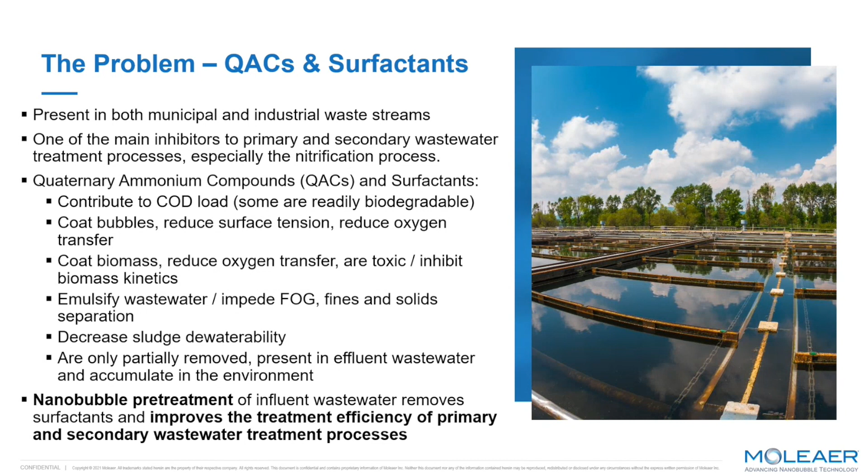They reduce oxygen transfer, which is our primary treatment method in wastewater treatment plants. They emulsify contaminants in water. They decrease the ability to remove water from our sludge at the end of the process. Overall, QACs and surfactants are working against the natural processes we use in wastewater treatment.

The source of surfactants is primarily from consumer products. They can be industrial in nature too, but when you think about your daily life, you have hand soap, laundry detergent, dishwasher detergents, degreasers in the kitchen or automotive parts, personal care products, shampoos, body wash, and cleaning and disinfecting products.

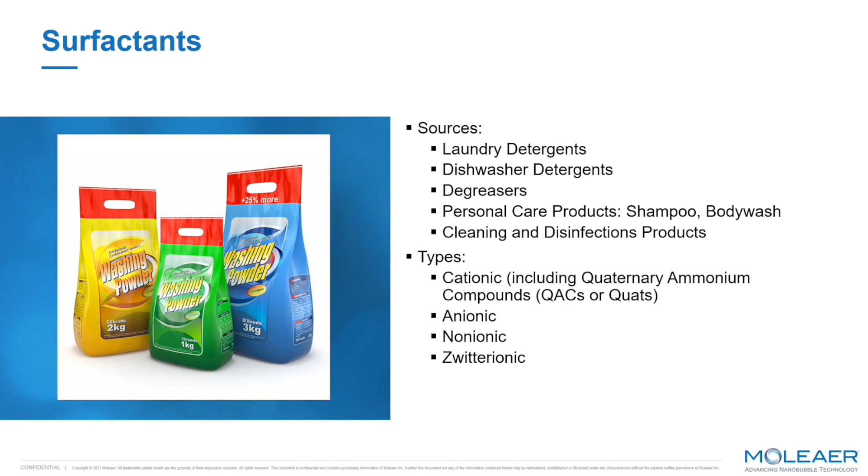Pretty much all of these products are common in that they are all different types of surfactants. They have different charges - some are positive, some are negative, some have both charges. But either way, these products all have a purpose, and that is to use water as a solvent to remove some other type of contaminant. So they're always trying to keep our contaminants within water.

So all of those chemicals have been around for quite a while, and the question always is, well, what's changed? Across California and most of the Southwest, the major change has been the amount of water we're using every single day. This has been really exacerbated by drought. We've always wanted to be more efficient with how we use water resources - it's one of the largest uses of energy in California.

But the droughts we've had over the years have made things much worse. Every single time we have a drought, there are new conservation measures. Back in the 90s, it was low flow toilets, low flow sinks, and so there was one level of conservation that occurred. Some of those things people fell back on when water resources were available - most people probably switched their shower heads back to a normal one because low flow ones aren't that great.

But after multiple years and multiple droughts, other major appliances have been changed out - washing machines, dishwashers. We're going from hundreds of gallons down to 20 gallons per load of laundry and even less on dishwashers. In a lot of these changes, when you spend that much money on an appliance, people aren't going back after the drought's over.

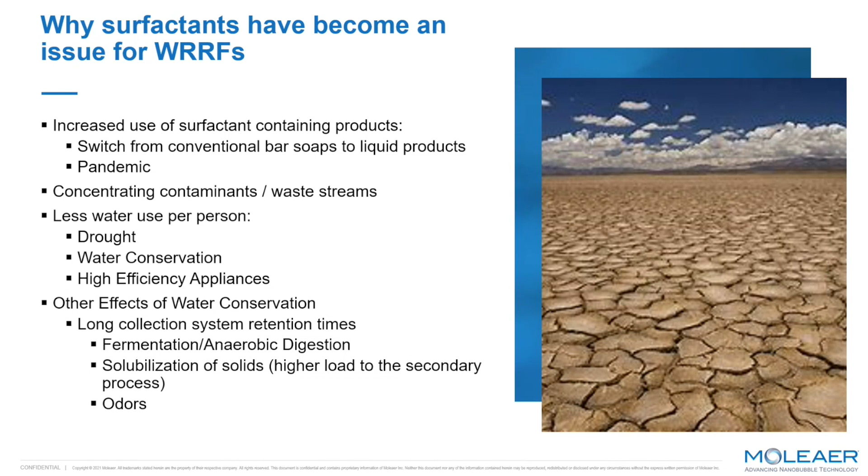So a couple of the effects that happen for wastewater treatment plants due to these lower flows and higher concentration of waste is that we have a lot more time - it takes a lot more time for waste to get from people's households to the wastewater treatment plant. This causes fermentation, anaerobic digestion of the waste. Ultimately, that means the waste is becoming more difficult to treat. Fresh waste is always easier.

So what are nanobubbles? They're extremely small - 2,500 times smaller than a grain of salt. Because of their size, they have some very unique properties that are different than any other bubbles. Some of these are that they lack buoyancy, they have random motion, and they have different charges.

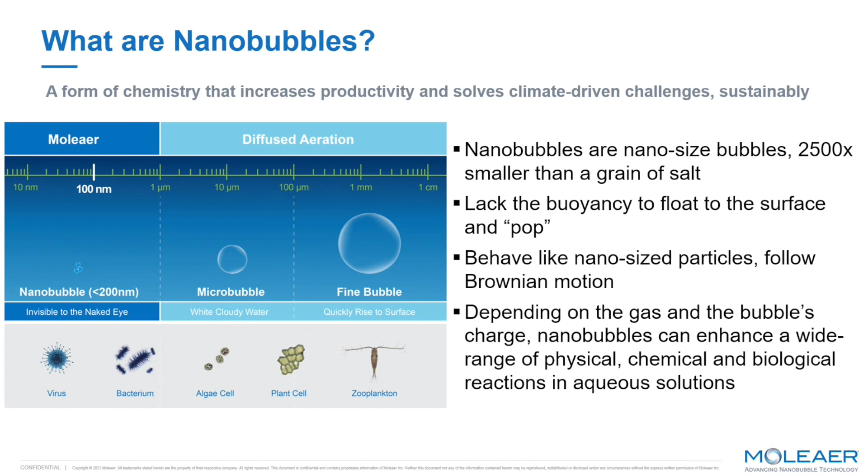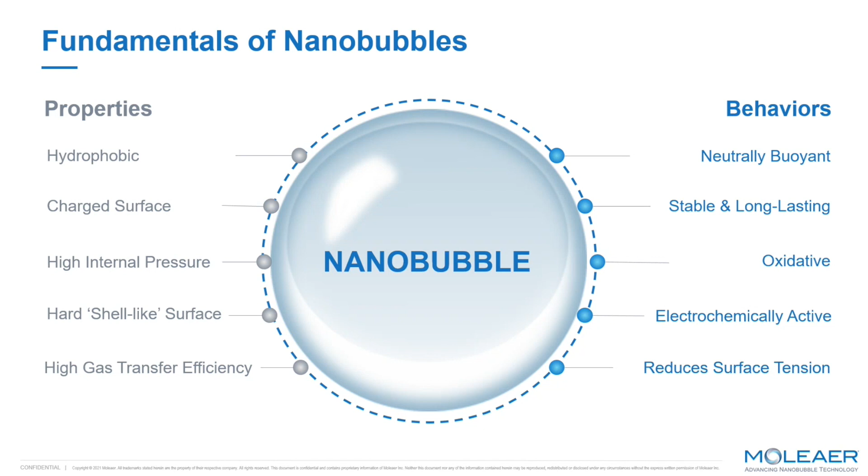The fundamentals of nanobubbles: they're hydrophobic, they have a charged surface, extremely high internal pressure, hard shell-like surface, high gas transfer efficiency. The behaviors are new, and these are what's very important to wastewater treatment - that they're neutrally buoyant, stable and long-lasting, oxidative, electrochemically active, and they reduce surface tension.

Surfactants interact with nanobubbles because of those properties and their size. Nanobubbles' hydrophobic properties are actually competing with the hydrophobic space that surfactants want to occupy. So the selection we see in wastewater treatment is that our nanobubbles and the surfactants want to occupy the same space. And because of their charges, they're attracted to each other.

So the theory is that when nanobubbles and surfactants come together, the nanobubble becomes destabilized and collapses. The collapse of the nanobubble produces a reactive oxygen species that we call the hydroxyl radical. When this happens, long chains - usually what we'd call the tail of the surfactant - are going to be broken down into something shorter and more readily removed from the wastewater stream.

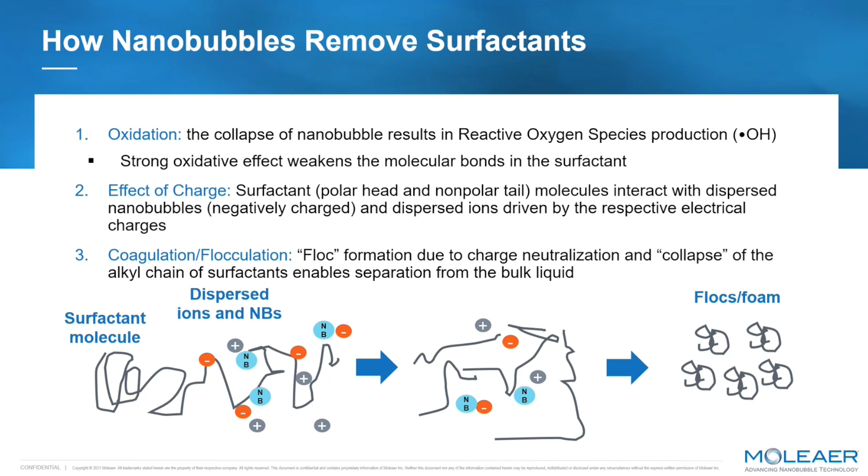Surfactants themselves are part of a measure in the wastewater that we call COD, or chemical oxygen demand. There are different types of COD, and this basically is how we measure the loading to a wastewater treatment plant. Some of the COD is particulate and can be removed in separation processes, either by filtration, sedimentation, or flotation. Other types of COD are soluble, like surfactants. One of the benefits to nanobubbles is that by breaking down these otherwise long chains of a surfactant, we're converting them from a slowly biodegradable form to something that's readily degradable and can be removed in the wastewater treatment process.

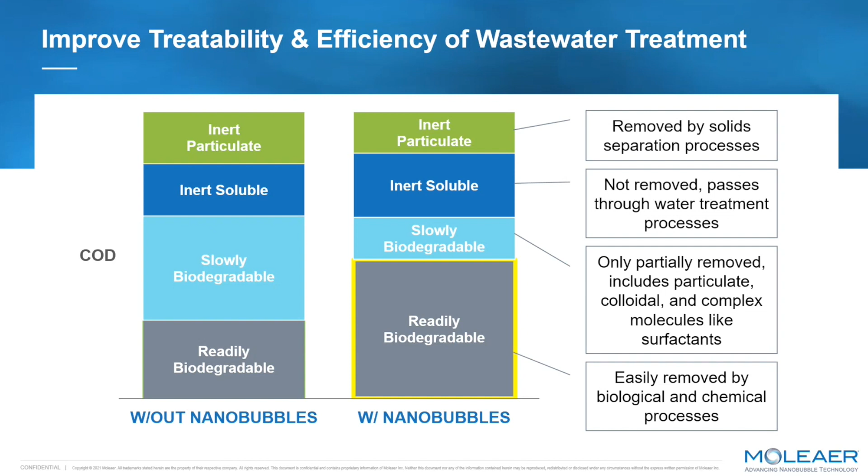So after a little overview on how nanobubbles are working as pretreatment in wastewater treatment plants, I'll go on to the full-scale demonstration at Goleta.

Goleta Sanitary has a design flow of 9.5 MGD. Their current average dry weather flow is 4.2 MGD, less than half of design, and yet they are fully loaded. Populations have increased, but the amount of water coming into the treatment plant has continued to either hold the same or decrease. So this plant is actually at its design capacity when it comes to contaminant loading.

Goleta's been aware of the impacts of surfactants since 2016, when they were having periodic upsets that were determined to be from periodic discharge from the airport across the street.

When you're on an airplane, the toilets that you're using don't flush with water. Instead, they use chemicals to stabilize the waste and reduce odors. Those chemicals are in that class of surfactant that I talked about earlier.

So a point source was really easy to identify and eliminate from the wastewater treatment plant, and we found a few others, got rid of those, and the plant was healthy again. The periodic upsets went away.

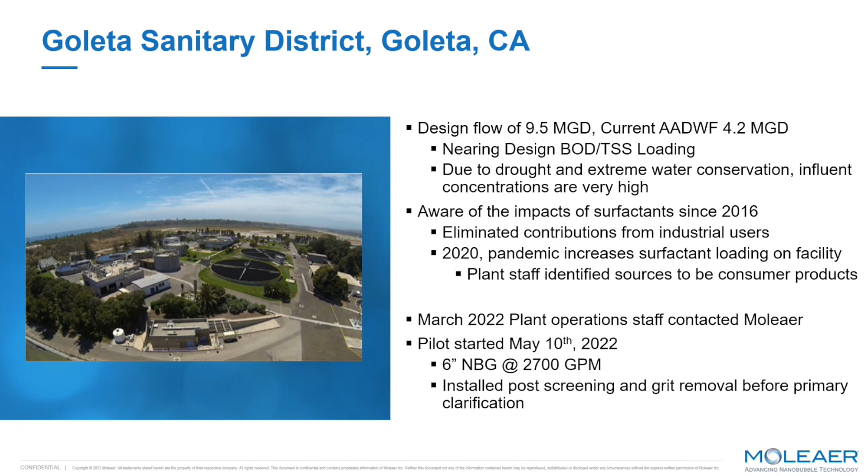For those of you that are not familiar with wastewater treatment, there are a few major steps that are consistent amongst most municipal wastewater treatment plants. First, we have preliminary treatment. This is where we want to remove things that really shouldn't belong in the sewer anyways. So we use physical screening to remove plastics and large objects, things that will plug or damage our pumps downstream. Next, we remove grit. This is fine grit and sand that would be abrasive and do damage, once again, to the pumps downstream.

The first process in most conventional wastewater treatment plants is primary sedimentation. This is where we use the relative specific gravities of the contaminants to either have them float to the surface or sink to the bottom, and we remove those contaminants.

After that, we have to go to a biological treatment process, and we use bacteria that consumes soluble contaminants within the water, and they use those contaminants as the building blocks to their own growth. So we're taking things that are soluble and putting them into biomass.

At Goleta, they have two different types of biological treatment process. The first one uses a media for the biofilm to grow on. So basically a lot of surface area, and they're spreading water over that surface area. The biology can attach to it. In between the water being spread, there's a lot of time for oxygen to come into the biomass. Once again, that oxygen transfer component is really important to wastewater treatment.

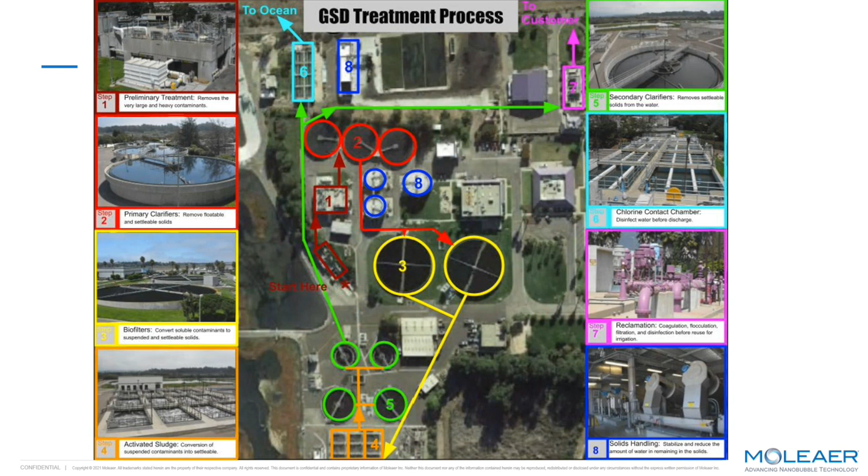Quick overview: the pilot installation at Goleta happened very quickly. We were able to get Moleaer to arrange delivery of a self-priming pump.

In this setup, we are actually installing after screenings and after grit, and that's to protect the pump and our technology. So we are literally pulling from a channel through a pump and back through our diffuser into the channel, treating almost the entire average dry weather flow through the nanobubble generator for at least one pass.

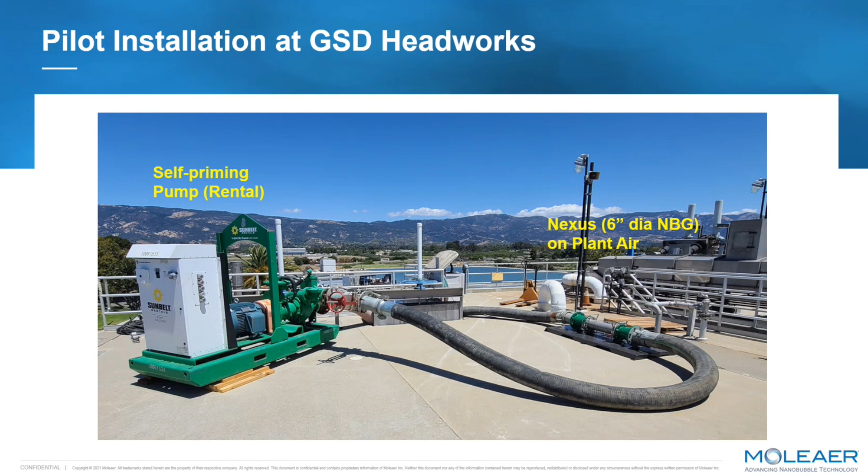The purpose of the installation at Goleta was to reduce the surfactant concentration. Goleta had done a lot of research and testing that correlated surfactant loading with these upsets, and for Goleta, the surfactant concentrations are very high.

There are different types of surfactants, but ultimately it's the total concentration that inhibits or diminishes the efficacy of the treatment process. For Goleta, the untreated wastewater had a total surfactant level of 11.7, which per literature is above what would be expected to see.

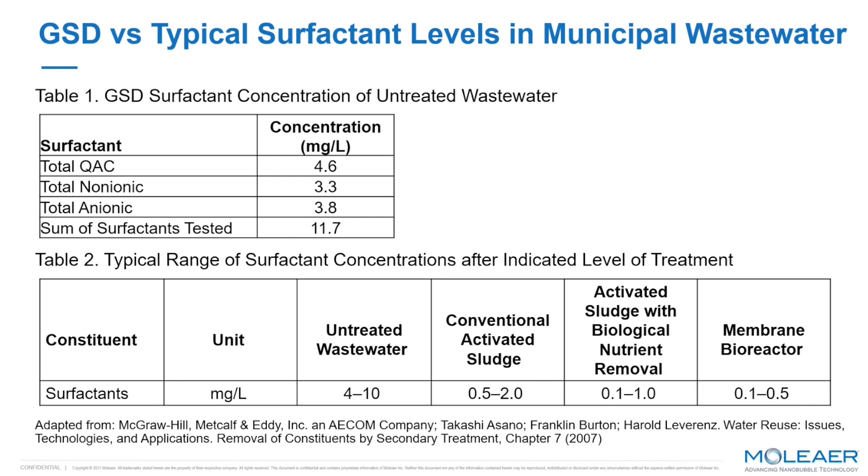With the nanobubble generator running, we did a mass balance across the primary clarifier to ensure that we were actually oxidizing these compounds into something else, and that they weren't just going out in the primary effluent or out in the primary sludge.

This mass balance shows how many pounds of surfactants are going into the primary clarifier before the nanobubble generator, and how many pounds are going out in both the effluent and the sludge.

When you think about this, you have nearly 400 pounds of surfactant coming into the treatment plant on a daily basis, which makes sense - you go to Costco and see those big packages of soap going out every day.

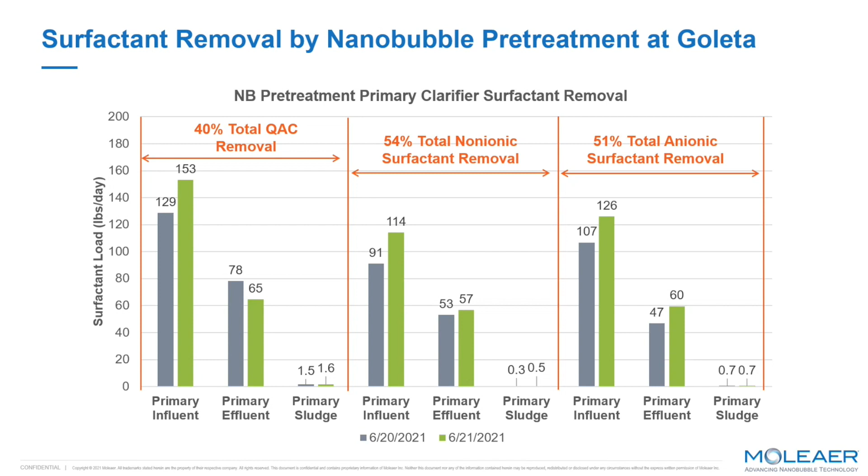The interesting part about how surfactants work is that they're trying to hold contaminants, but when they're in high concentrations, they're also trying to get out of the water. Surfactants want to coat the interfaces between surfaces and water, and that's also how they coat bubbles within the wastewater treatment process, preventing efficient oxygen transfer.

If you think of a natural lake or pond, if you were to stop the oxygen transfer through the surface, you would cause septicity and anaerobic digestion if solids are available, which could cause fish kills and other major problems. So by removing the surfactants, we're improving that natural oxygen transfer, keeping this equalization basin fresh and helping reduce odors that could form.

It's really amazing to see an almost instantaneous difference in our equalization basin at that plant.

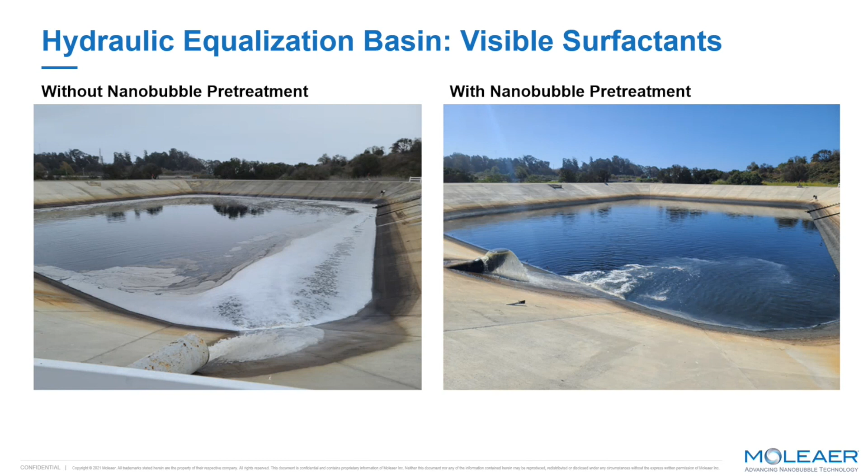For liquid-solid separation, once again, surfactants are trying to use water as a solvent to pull things off that are otherwise not miscible or are hydrophobic.

The improvements with nanobubbles that we saw in the primary clarifier were once again very instantaneous, with significant odor reduction. We're seeing nice clear water from the top of the clarifier all the way down to the bottom where the sludge or solids are accumulating.

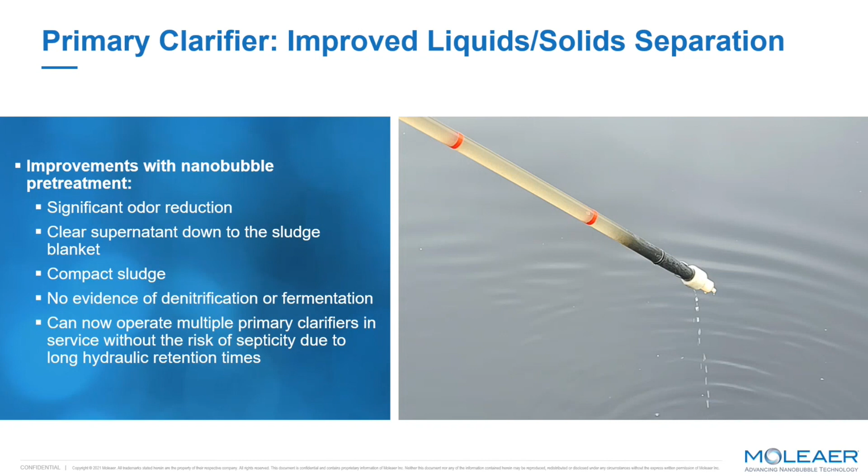The solids are compacting well. They're not denitrifying or fermenting. This allows us to hold these solids in the primary clarifier longer, concentrating them better, which makes some of our other processes in the treatment plant more efficient.

Prior to nanobubble pretreatment, we were removing about 69% of the total suspended solids to the primary clarifier, which is not a bad number, it's within what you would expect. But instantaneously after nanobubble pretreatment, we're seeing a 10% increase to 79% removal, which is considered very high for this type of technology.

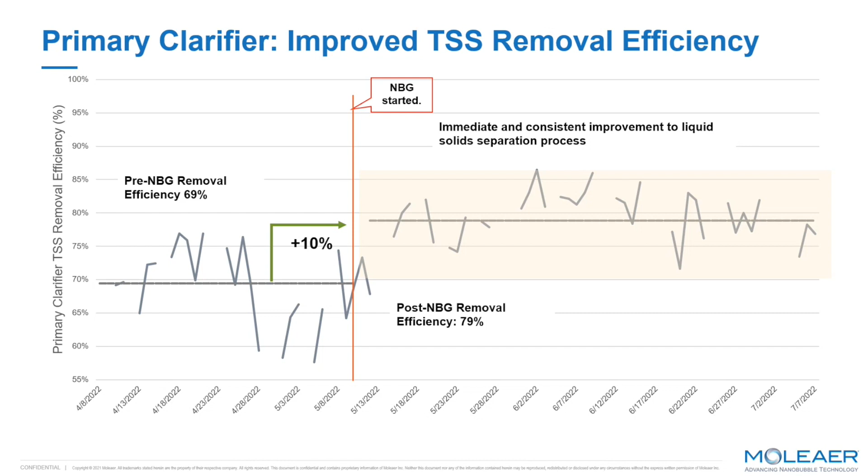In wastewater treatment and in the activated sludge process, the way that we control the process is by the age of our biomass. We calculate how much biomass we have in the treatment plant, and we systematically remove a portion of it to maintain a certain sludge age, which we call sludge retention time. Each time we go through that sludge retention time, we're theoretically renewing the biomass.

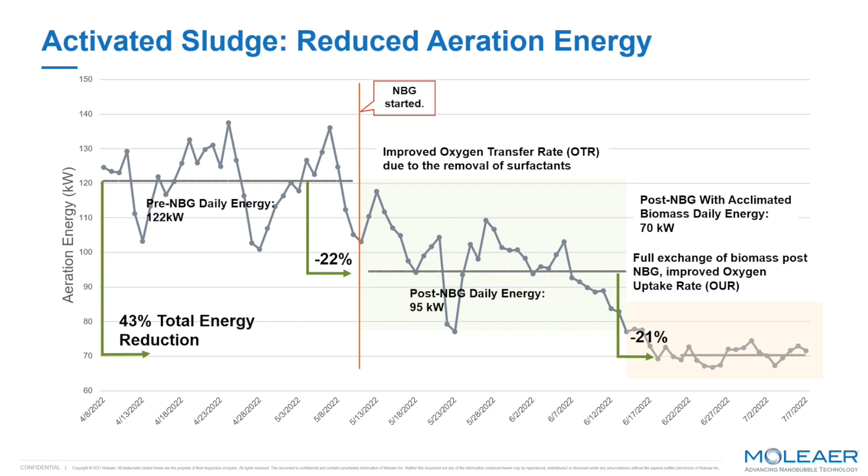So other benefits to the activated sludge is the improved settleability. Goleta's always had a really great settling sludge, and there's a lot of importance to the settleability of the sludge. We're taking soluble contaminants from the water, adding them to biomass, and then putting that biomass into a clarifier to separate it out.

So at every wastewater treatment plant, there's usually a way to contact the water with the biomass and a way to separate the biomass out, and it's done in different ways at different wastewater treatment plants, but an activated sludge aeration basin and a secondary clarifier are the most common way that we do this.

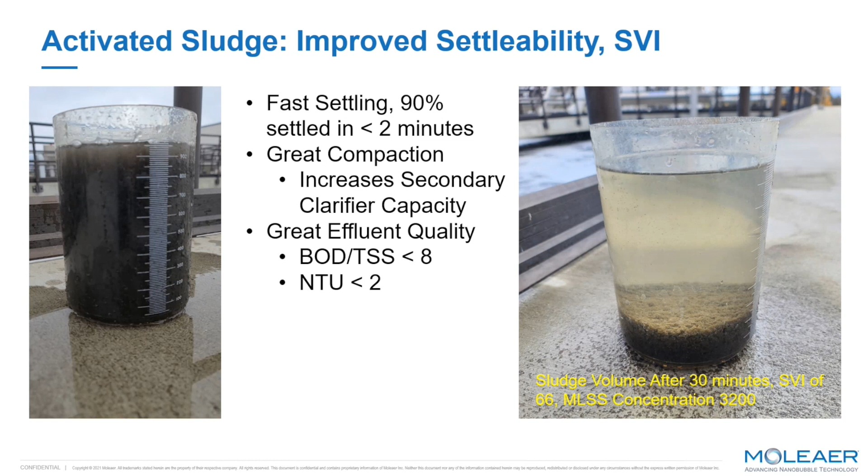So with that, we'll look at the effluent quality improvement. One of the measures of effluent quality is biological oxygen demand and total suspended solids.

With wastewater treatment, almost every single municipal plant in the United States has an NPDES permit, and every single one of these plants will be measuring BOD and TSS. The purpose of the NPDES program was to protect the waters of the United States, primarily focused on ensuring that we weren't killing fish. So one of the measures of the effluent is biological oxygen demand, to make sure the water being discharged to the waterway wasn't going to consume the oxygen that the fish needed.

So the treatment process itself is trying to take this BOD and transform it or accumulate it as solids. At the beginning of this graph, we see that our BOD is considerably higher than those solids, and what that says to me in the wastewater industry is that the process isn't that efficient at converting those soluble contaminants to something that can be removed.

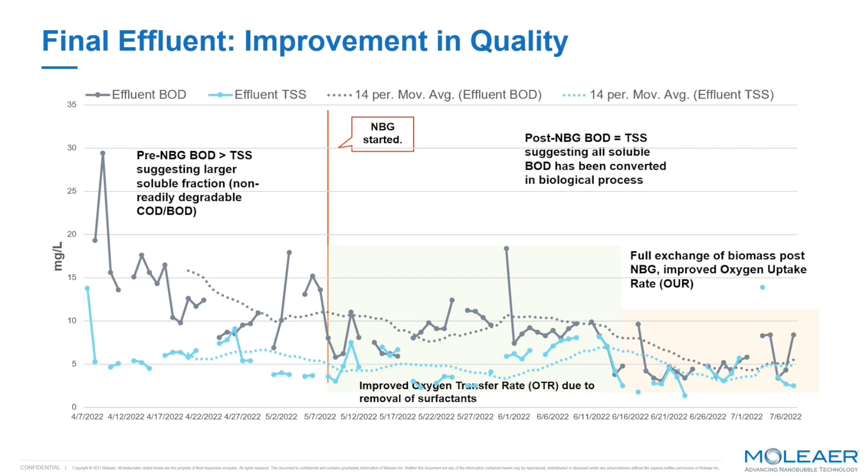Another change related to both of those aspects of the pretreatment is the amount of chemical we needed to use for disinfection. Most wastewater treatment plants use chlorine bleach to disinfect their water. Chlorine bleach is very reactive and will react with organics in the water, and that's what we consider when we see an initial chlorine demand. What that means is that we're putting in bleach and not actually getting a chlorine residual, because there are reactions happening in the water that use up that bleach before we can even start disinfecting.

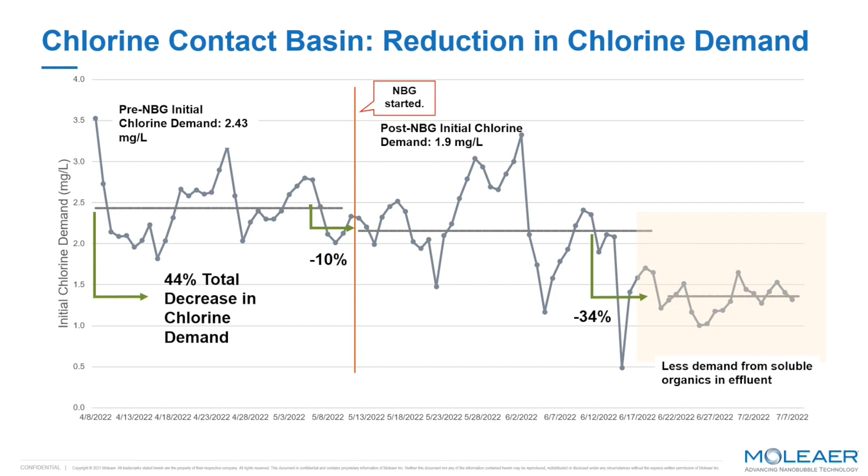As the biology became more efficient, we see the process health improve. For one, the massive swings become a lot more stable, but also we have significantly less initial chlorine demand, due to removing those organics from the waste stream. So all of these things are great, and more than anything, when you start to see a more stable process, you have much happier plant managers and plant operators.

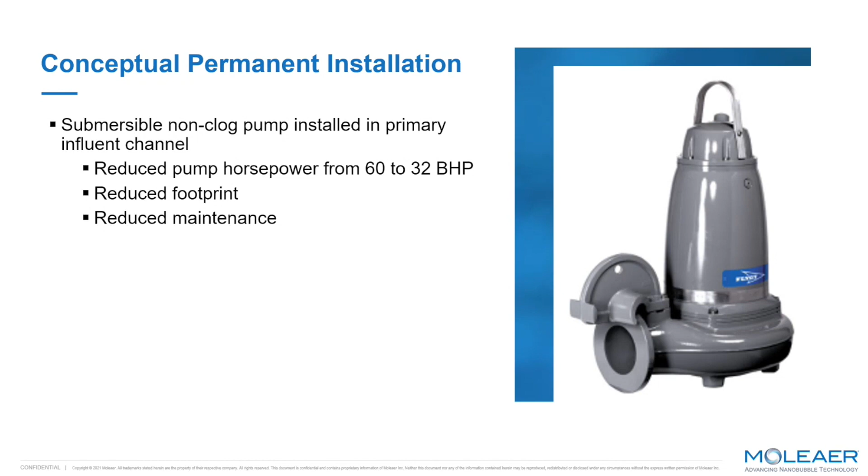So to move forward, the pilot or demonstration used a rental pump. They're definitely designed to be very flexible and deployable, but they aren't the most efficient for a long-term installation. So for Goleta, we're looking at a submersible pump in its existing channel, and we're able to decrease the energy or horsepower of the motor considerably as we size to the need, rather than using a rental pump.

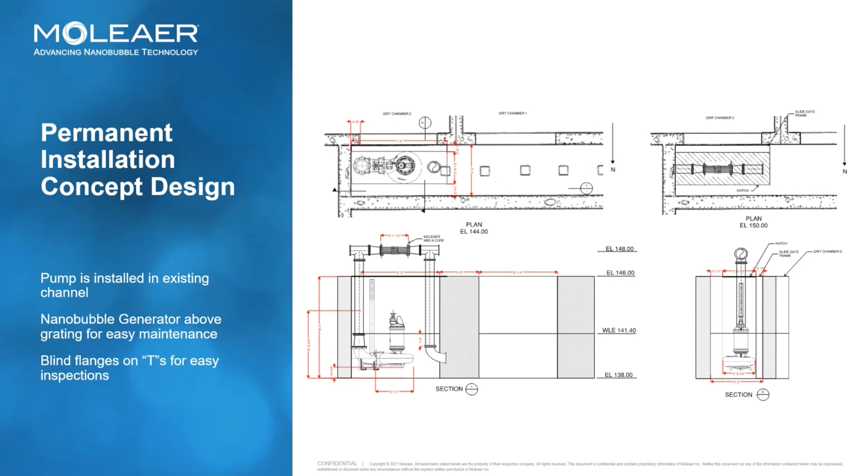So what does this all mean for Goleta? They're happy, odors are reduced, the process is more stable, but it's also important to do the right thing for the ratepayers and make sure they're not spending money without justification. So the net reduction in energy demand came to about $32,000 a year.

The reduction in sodium hypochlorite bleach and sodium bisulfite, $15,000 a year. Goleta, to help counteract the effects of the surfactants, was using bioaugmentation, which is very expensive at $44,000 a year, and they are now able to eliminate that. And because of the improved efficiency of the process, they're actually able to remove one of their biological treatment trains, which has an energy cost of $36,000 a year. So in total, there is an avoided cost of about $127,000 a year.

So this is really compelling information when it comes to a sale, but also to a general manager being able to convince their board of directors to go ahead with a permanent installation.